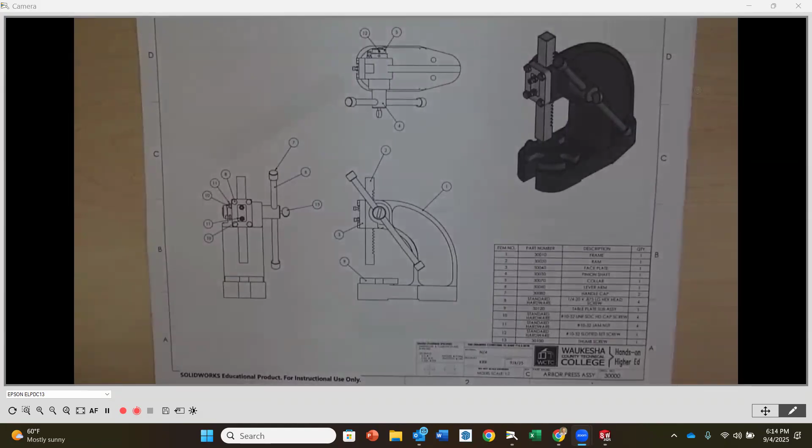Okay, what I wanted to talk to you about now is the guide drawings that you have. What I've put together here for you, if you would, I mean they're good drawings, but I'm not going to say they're fully complete. So we're going to go through and talk about some things here so that you have some good direction as you work independently and use the resources we have here, so you're mindful of a couple things that I have.

First of all, assembly. This is the first guide drawing that I have. A couple things about assemblies: remember, we don't add hidden lines to assemblies. If you want to put some center lines in, that's okay, but typically we keep those out unless they add any sort of good details. So I took all of them out because there were way too many, or I made too many hidden lines, to make sense of anything.

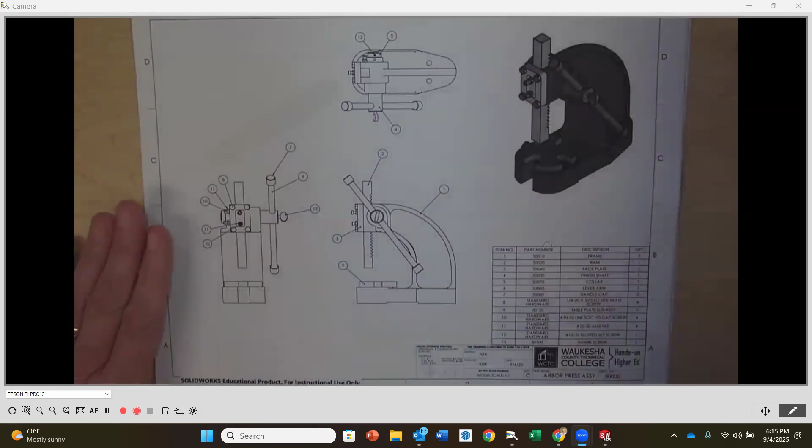So then you're going to notice that you want to balloon all the items. I have 3 views here so that we can see everything. Make sure that you balloon in all 3 views. If you don't balloon in a view, then it's like, why do you have the view? But I felt the top view gave us some more clarity as far as what that assembly looks like. Make sure you put a pictorial up here.

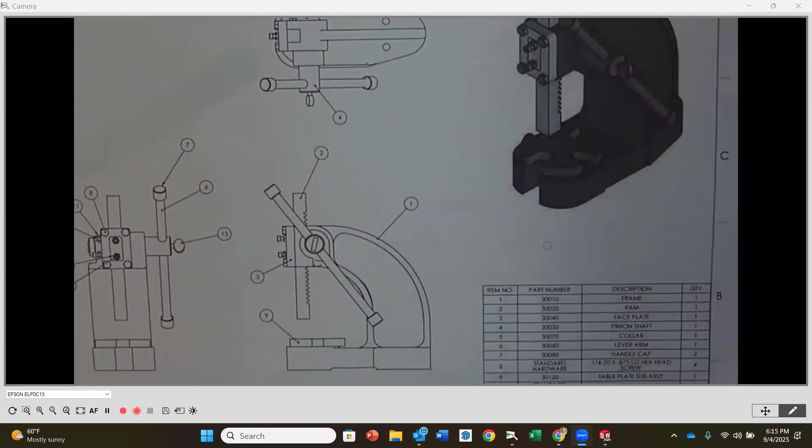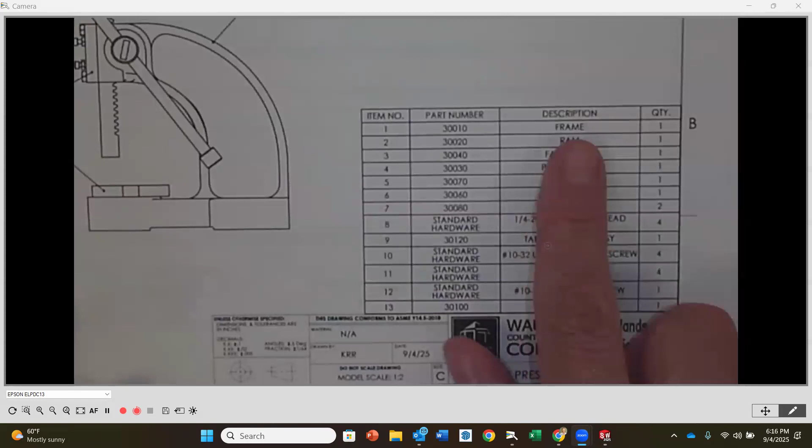And I kind of briefly talked about this earlier, but when this comes in, as long as you save all of your files as the part number and not the part name, the part number will populate for you automatically. The description you will have to put in. When you double click in that area, it's going to ask you if you want to preserve the link. Always say yes to that, no matter what.

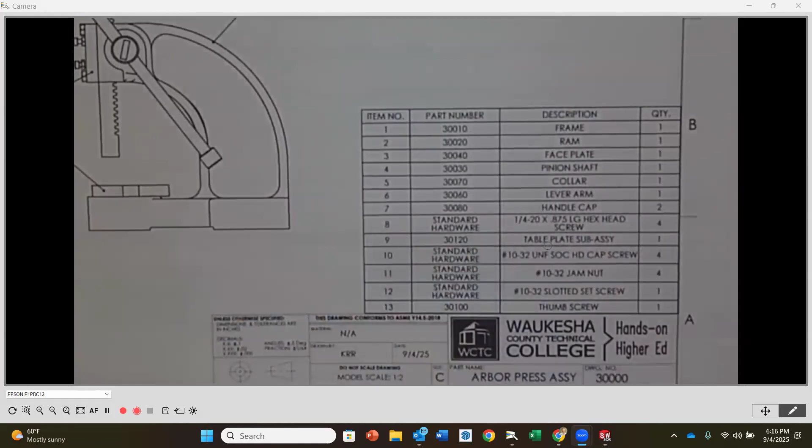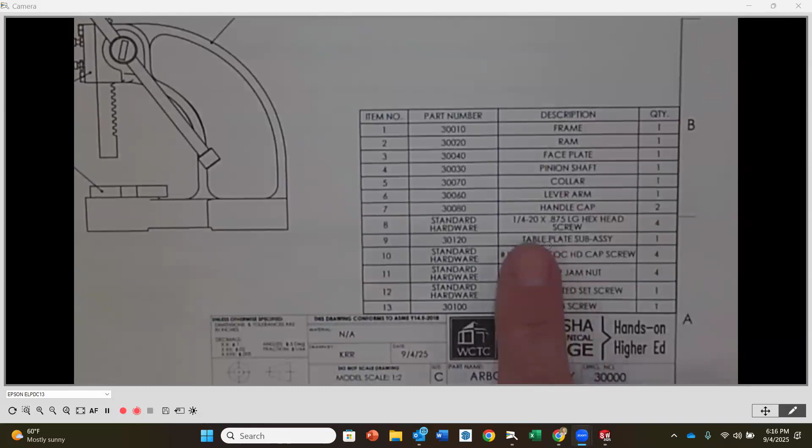Here it's going to populate with their standard weird callout for fasteners. You want to double click on that, again preserve the link, but then delete what's there and say standard hardware. And then you want to put a little bit nicer, easier to understand description. So it's a 1/4 20 by 0.875 long hex head screw, something like that. You can use what I have here, that's no problem. And then quantities, as we know, are going to automatically populate.

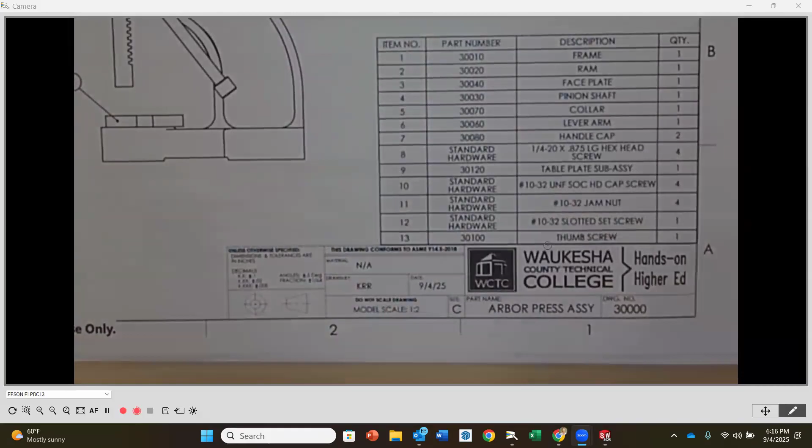Don't forget to fully fill in your title block. The material is non-applicable, but put something there just to recognize that you didn't forget to put it in there. And then your name and date and such. The drawing number will automatically populate, but you'll have to put in the part name. All right, so that's the assembly drawing.

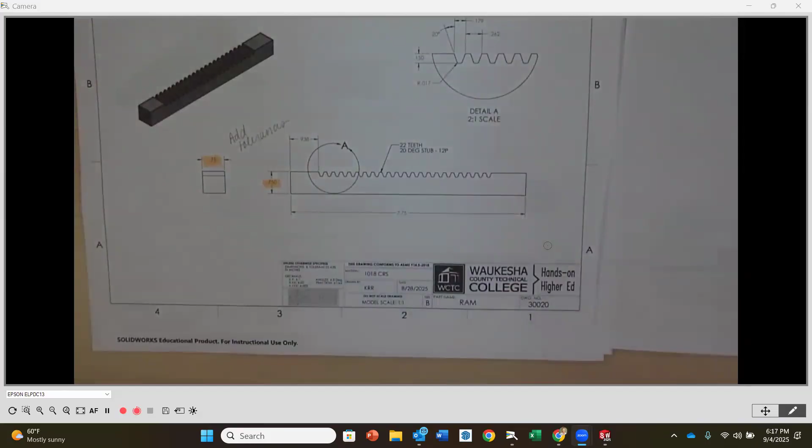The next one here that we have is our RAM. A couple people have been asking about this one, as far as the tooth profile - that's part of one of the handouts that we have in the learning plan. This is called a stub gear. It's typical, when you lay it out flat, like a rack - it's really a rack and pinion, what we have going on with our arbor press going up and down. These are the teeth that are there.

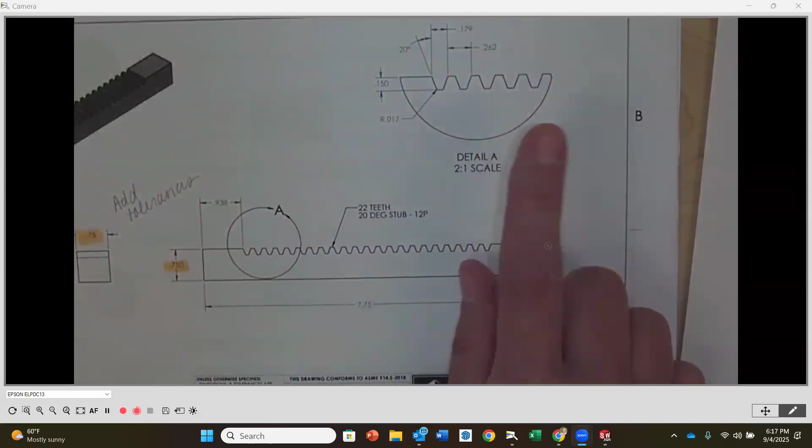The details for that are in the handout, but they're also here too. I did make an enlarged view - you do need to do that for your detail, that's something that's required. There's no way you can fit those dimensions here and make sense of it; you have to make a detail of it. If you don't know how to do that, let me know. But I think also, with what you know about SolidWorks and playing around a little bit, you probably can make it work. But again, I'm here to help if you need to.

The notes that I have here now, there's 2 dimensions on here that are just nominal.

Remember, when we did our tolerances and fits practice problems, you needed to identify the fit of the RAM into the recess on that head, that top head of the arbor press frame. You want to update those. On this particular drawing, I didn't put those in. Those are yours. Remember, you've got to choose the fit and what those limits would be, and now you want to put those limits here.

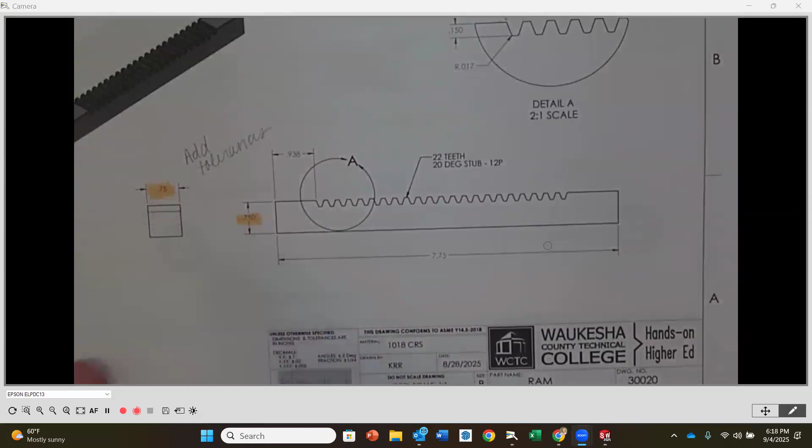It's come to my attention that 1018 is not listed in there. I'm surprised because it's a very common type of metal that you can grab, the run-of-the-mill steel we always used for most everything. So if you did want to put in 1020, I don't really care, but it just has to be a steel.

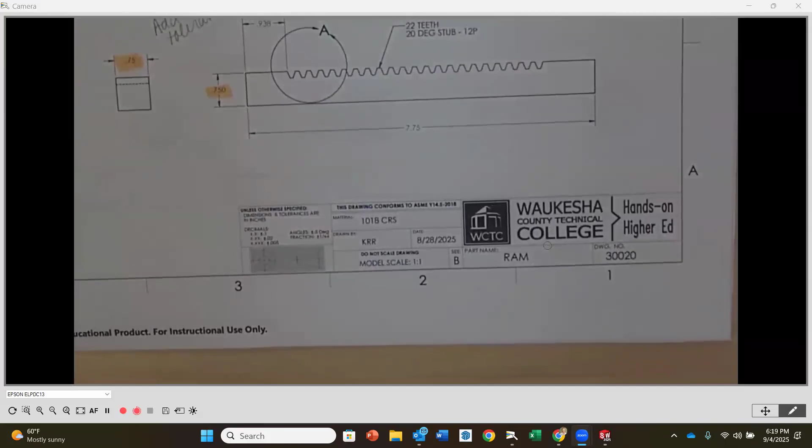All right, so that's the RAM. The next one here, we already kind of touched on this one, this is the pinion shaft. We looked at how to create this. So if you need to, go back to that, you're welcome to do that.

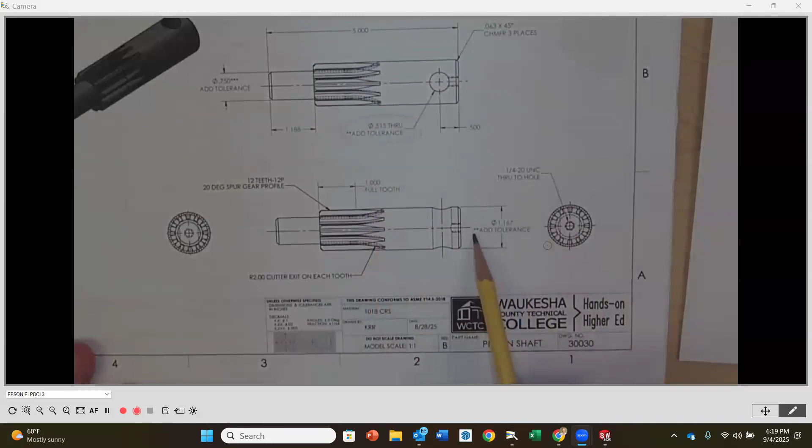Couple things here: here we need a dimension for the tolerance, here we need a dimension for the tolerance, and here we need a dimension for the tolerance. These were things on your practice problems that you needed to work out, so make sure that you do that on there as well.

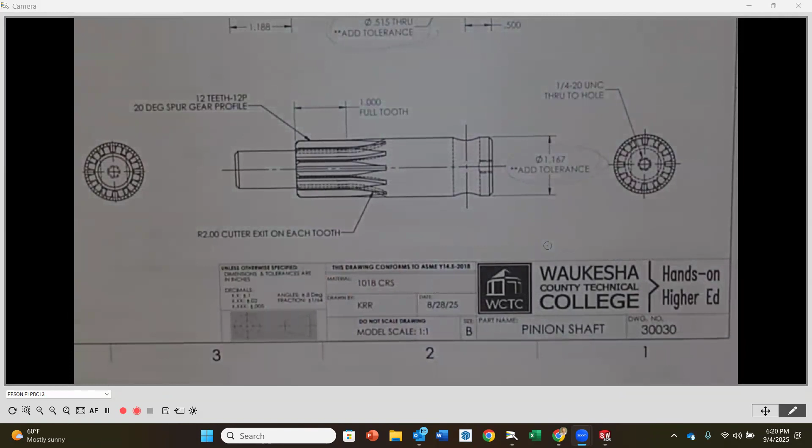I do have a note here. I went over and over again, like, how do I put this in there? Because there's not a clean radius to grab dimensions from, and it's not super critical. So the note I put here was just a 2-inch radius cutter exit on each tooth. That's what I put. I thought manufacturing will understand what that means, because they kind of need to know how far can I go with this. Again, if it goes a little farther, if it's a little shorter, it's totally fine. What's really important is the 1-inch full tooth, that we get that.

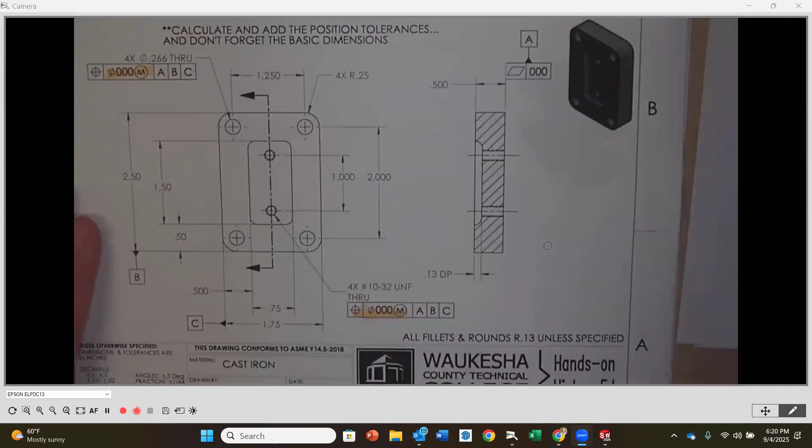So that's that. The next one here is the faceplate. Couple notes on here: first of all, we are going to be putting GD&T on this. I will be talking specifically about GD&T and how you would apply this with the frame where it attaches, and I'm going to be going over that the next time we get together, which is next week, Tuesday.

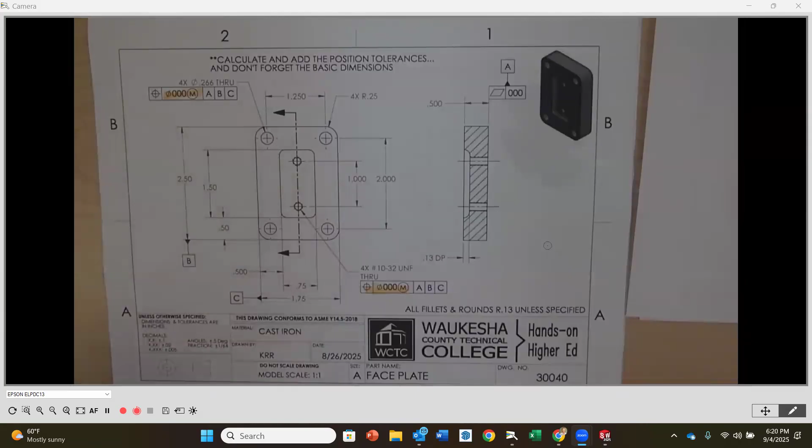This is enough information for tonight. We'll add the GD&T a little bit later. But if you did want to go ahead and you're like, I totally remember GD&T, I mean gosh, it hasn't been that long, this is going to be a fixed fastener application.

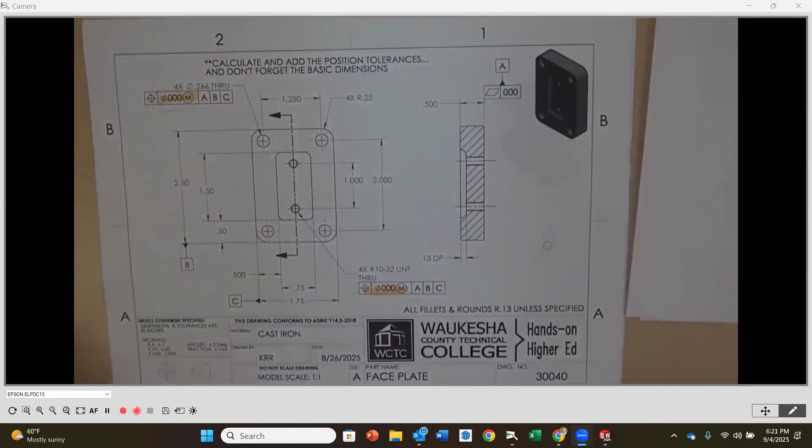These are the clearance holes, and your threaded holes are going to be on your frame. So the number that goes in here is that fixed fastener application. I will go over how to calculate that the next time we're together, but if you're like, I got it, no worries, then go ahead and put that in there.

Additionally, I have a little note up here. You do not put this note on your drawing. It says calculate and add the position tolerances, and don't forget the basic dimensions. I didn't put them on here, so you want to make sure that you add those as well.

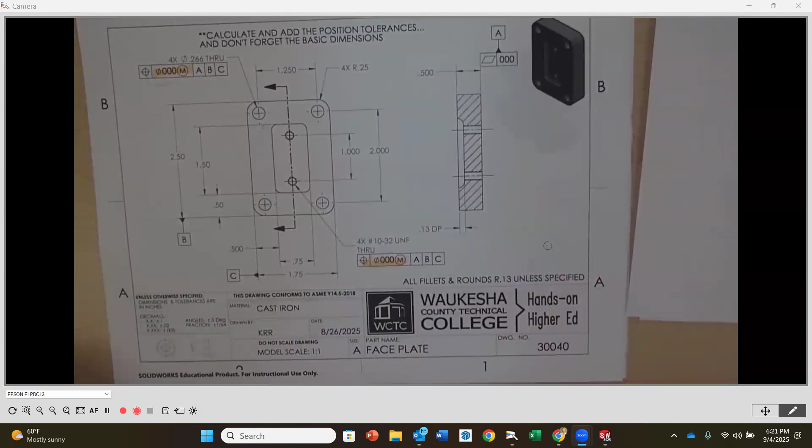I did leave the datums on, so if you want to leave those, that would be correct. I also have a flatness tolerance on here. Notice I have zeros there - that doesn't mean that it has to be perfectly flat. It means you're going to have to fill in and decide on a number there too.

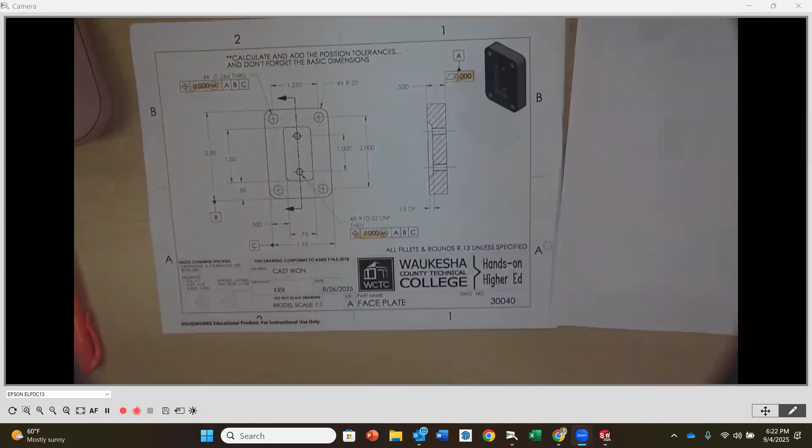So there you go. This one is a cast iron part, and then it's machined to be nice and smooth. So that's the faceplate.

The next one that we have here is the table plate. The table plate, as you recall from the video, has 4 different sizes of the cutouts. So just be aware of that.

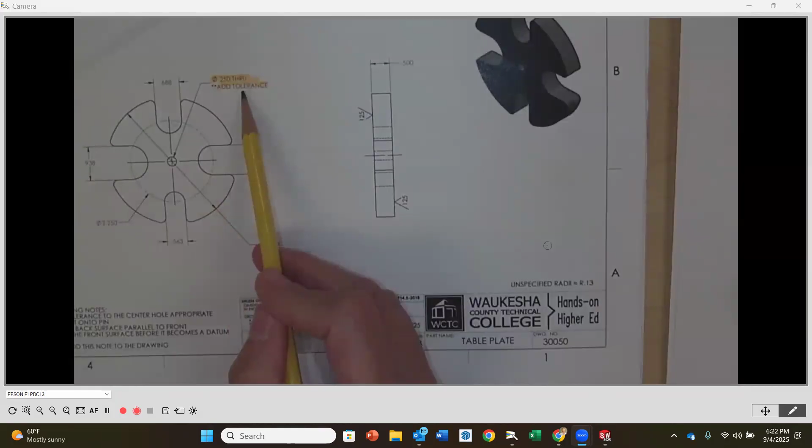You need to add the tolerance here so that you can get a press fit with the guide pin. And I think that's about it. I did put some finish marks on there. Play around with that—it's a good idea to do that too.

Oh, I do have some dimensioning notes here. So yeah, you want to add that stuff as well.

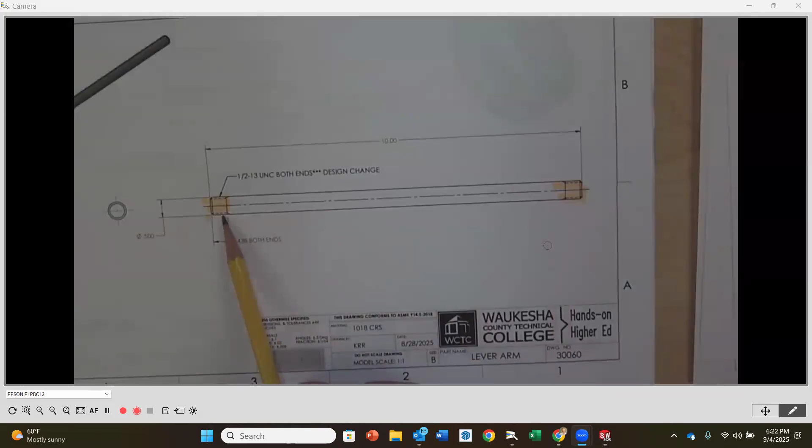The lever arm—I did make a design change here, okay? And this is totally up to you how you want to do it. But I kind of wanted to add threaded ends to our lever arm so that instead of having the knurling and pressing the handle caps on, I would just screw them on.

And then that way I can screw them off, and if I want to take that handle out, I can. I don't know if I'm going to want to, but I thought it would just be an easier assembly, and potentially have some benefits later on.

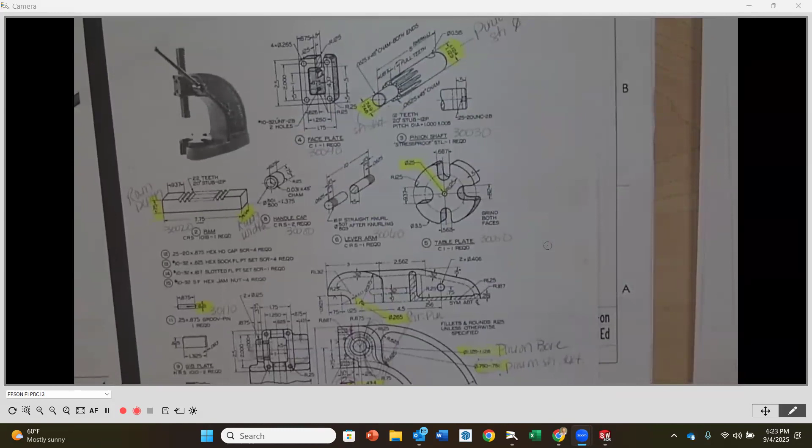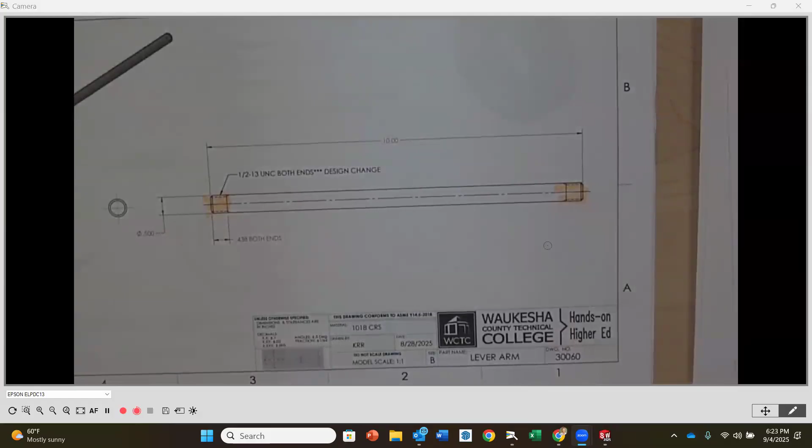So it is a design change. If you want to stick with the knurling, then you would just put the knurling there, and then you would tolerance that inside to be a press fit of the handle cap. In my case, I threaded the inside so that it would mate up with the threads here. Okay, so that is the lever arm—totally up to you if you want to adopt that design change.

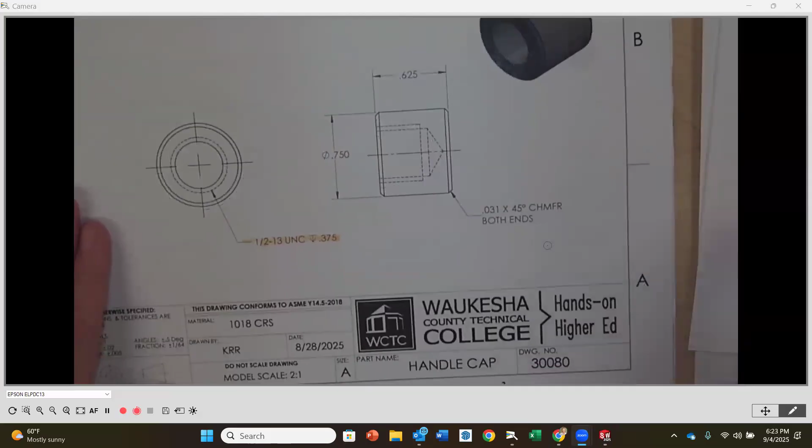The next one, here's that handle cap that goes with that lever arm. Again, I changed this to be a threaded hole on the inside at a depth, so that it would mate with that arm. If you're going to do a press fit, then you would have to call out an FN-something fit. Totally up to you.

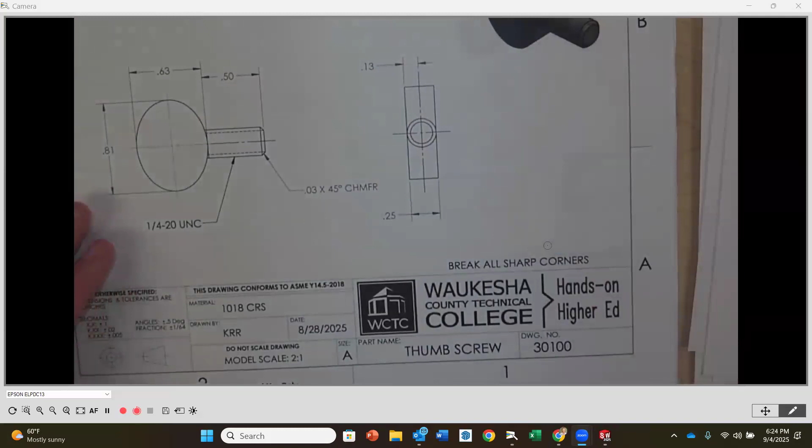The thumb screw—okay, the thumb screw, if you look at the part here, you're going to notice that it shows you kind of this profile, but it doesn't give you much dimensions in terms of what that side view looks like. And all that is, it's like an indent so that when you're screwing it, your thumb kind of fits in there a little bit nicely.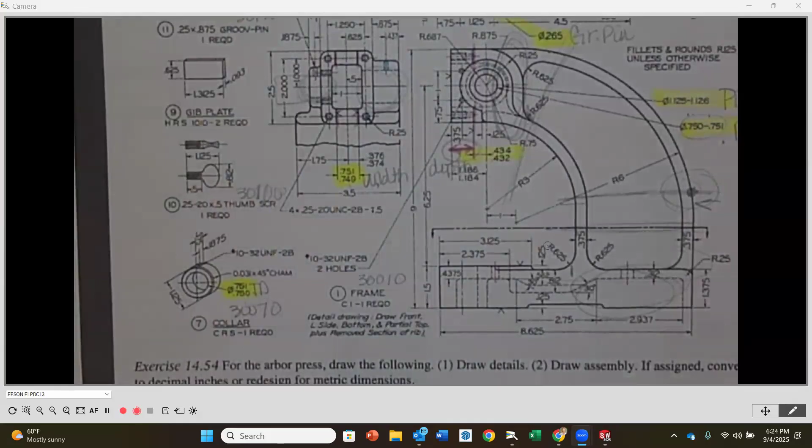So I didn't make mine so fancy. I made mine super simple—I just did an ellipse, and I made it the same width as a 1/4-20 thread on one end, and I just made it as one piece. And then I just said break sharp corners, so that we don't have sharp corners when somebody wants to use it.

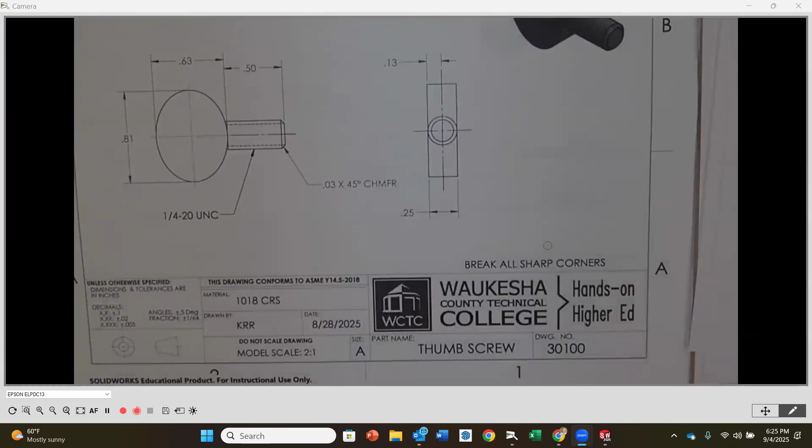If you want to add indents and radiuses there and make it super ergonomic, that's totally fine, but you don't have to. You can keep it super simple. All right, so that's what I did there.

You're the designer. Isn't that kind of fun?

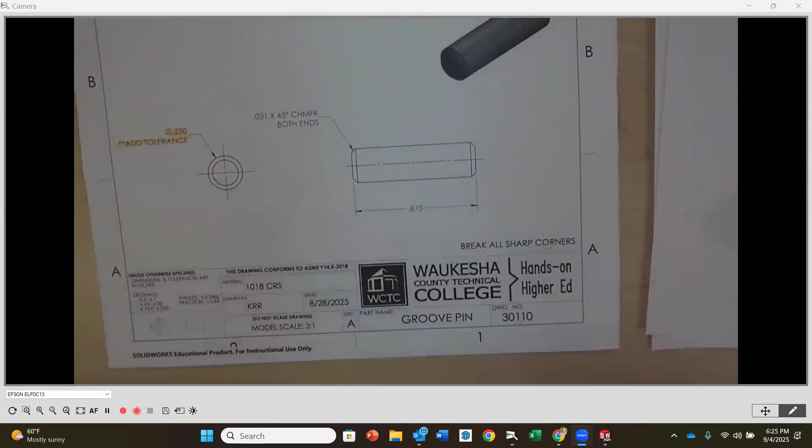All right, then the next one here, this is our groove pin. We know that the groove pin, we have to add a tolerance to the OD so that it can fit and press into our table plate. So that needs to be added there.

And then you need to make a small little subassembly for the table plate, where the groove pin presses into that table plate, and then those become one part. And this is going to be the number 30120, or 30-120, which is then the part that you pull in.

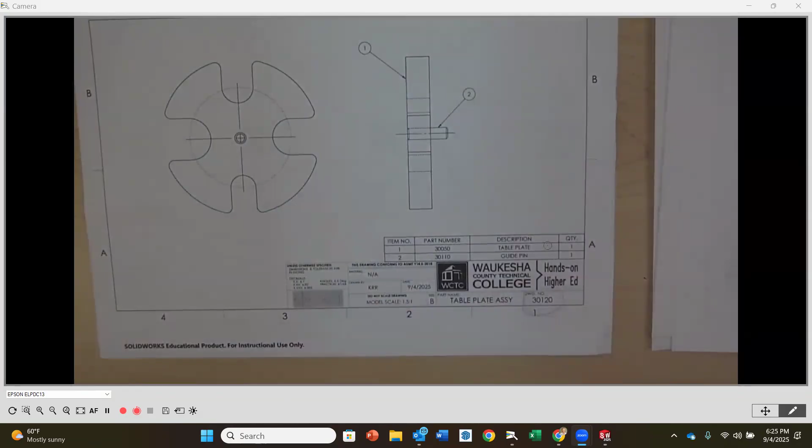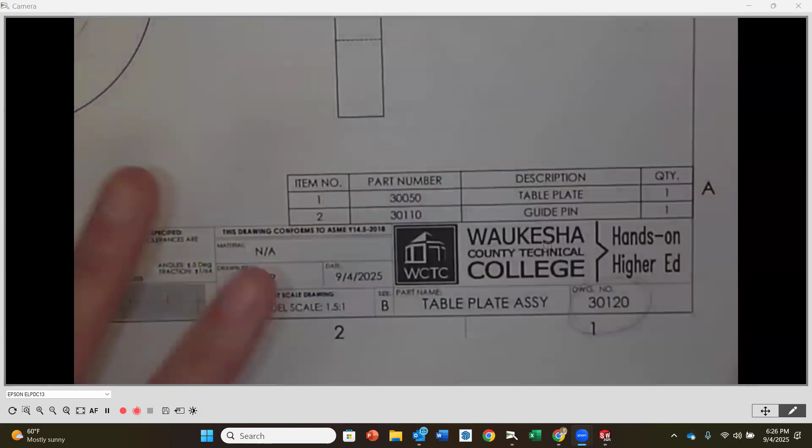You will not have a table plate or a groove pin here on your assembly. What you have is the table plate subassembly, and on that subassembly, that's where it calls out those two parts. But you won't see the individual parts on your overall assembly. Make sense? So here you're going to make a little subassembly.

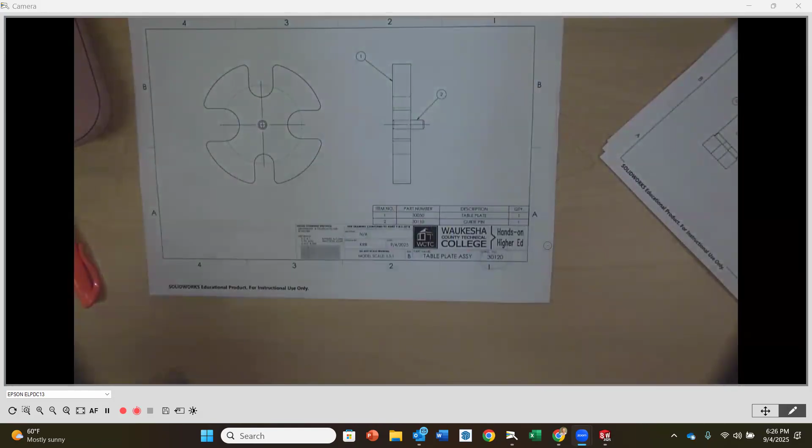I didn't put the pictorial in the corner because of the way I designed it, with the pin coming in from the back side, you couldn't see the pin on any of them. So I'm like, what's the point of the pictorial? I just made my views bigger. I did keep the hidden lines in here because I thought it was beneficial to see that pin fit on the inside. Again, that's a judgment call on your end, and there weren't too many hidden lines, so I just kept them. So that is that subassembly, and then this one is the frame.

Again, like I said earlier, this is my Creo version because I haven't completed my SolidWorks version yet. I was playing around a lot with that loft for a good week. It was driving me crazy. I'm like, it's got to be easier than this. The only other way you can create it is by doing extrudes and cutting, extrudes and cutting. And honestly, I think that's a bigger job than doing the lofts.

The lofts, it's literally, yes, it's the sketches and the planes, but it's one function or one command that you have to do. So I really felt that was the better one, and it gives you the opportunity to practice with something that I feel is a little bit more advanced. So you can see how that works.

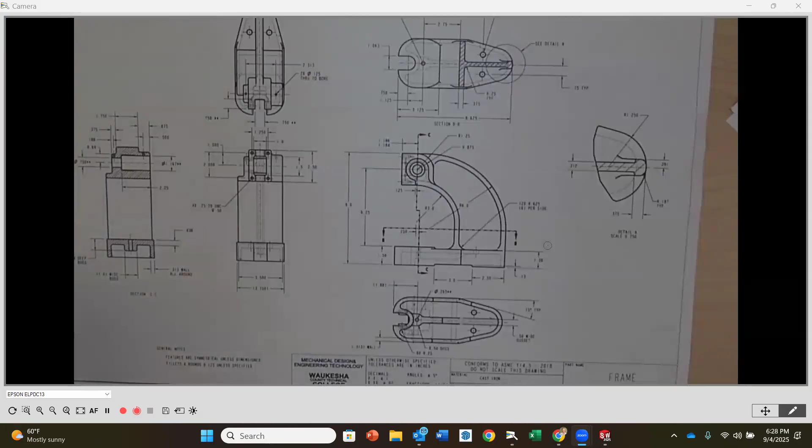So this here does not include the tolerances again, that we had talked about in our practice problems, and it does not include GD&T on here either. So those will be adders. But I wanted to give this to you because in combination with this, sometimes this is kind of hard to look at. Where if you have a couple of views here, that might be helpful as you're generating that model.

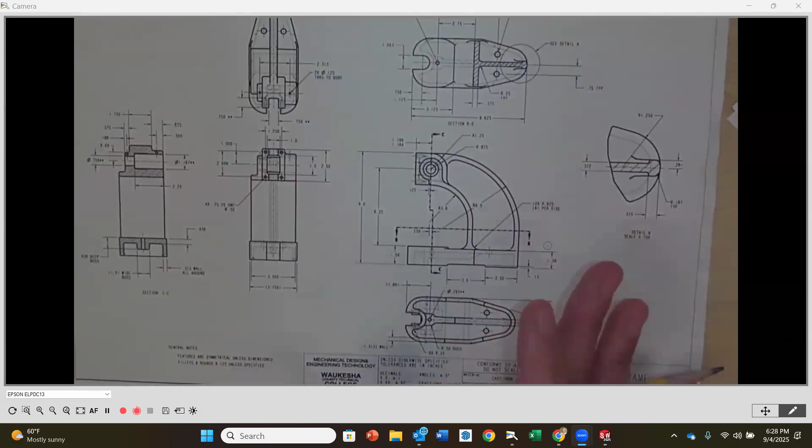So are there any questions? That brings us to the end of our drawing guides. If you deviate from the drawing guides, just make sure that you are adhering to the ANSI standards.

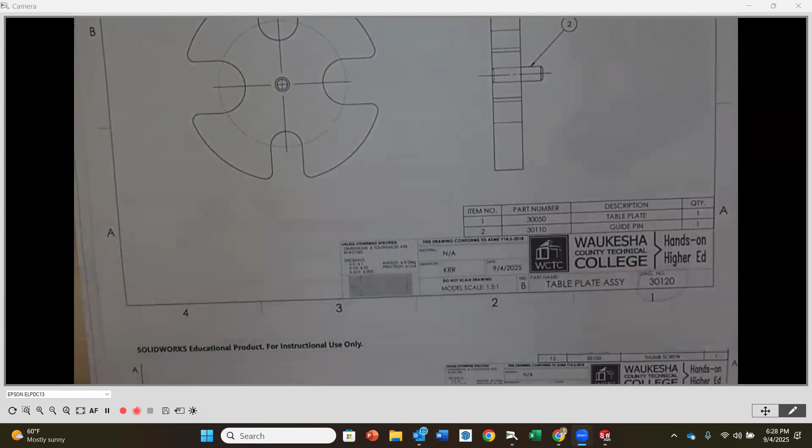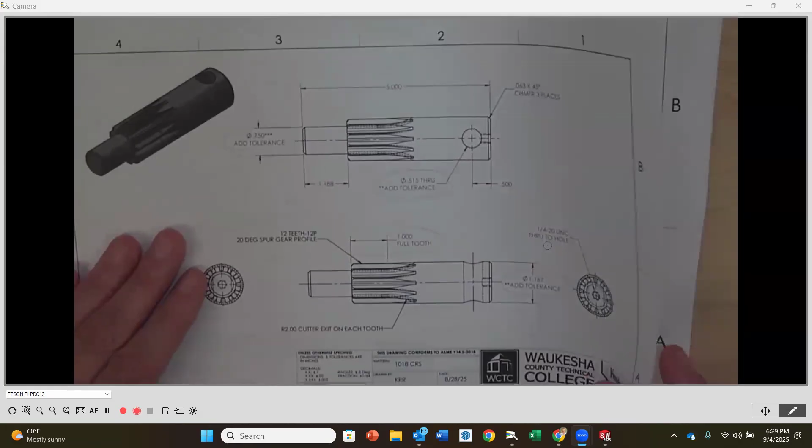I also, you're going to notice that I have the scale here. Those did change here and there, but notice that I'm not all on one side, or they're not small little views and then there's a lot of space. You want to have an appropriate size border so that you can fit your dimensions on, and that they're readable.

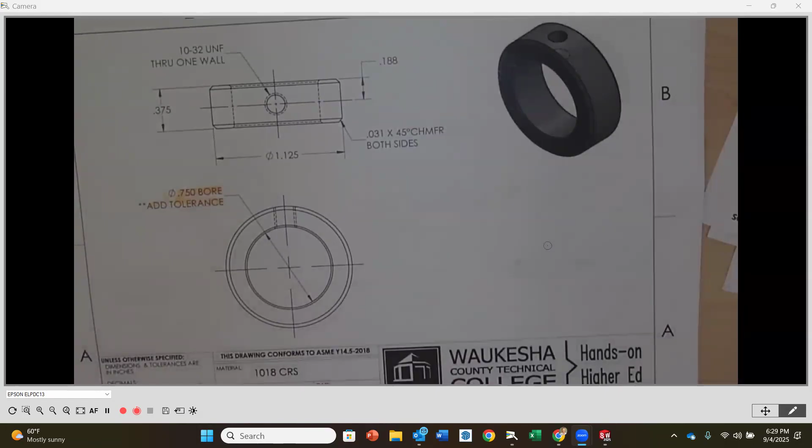So use this as a start, and if you make them just the way you see them here, it's totally fine too. There's still work to do. You still got to generate them. You still got to do the tolerances. There's stuff here to do. But especially when you're learning the standard, and I feel like you guys still are learning the standard, you need something to jump off of, rather than just start blank. So this is some good stuff to jump off of.